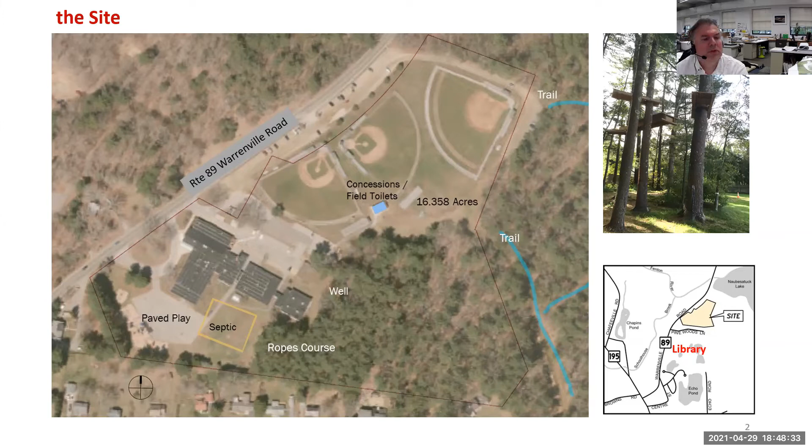As we think of the building fitting into the site, we look for opportunities for outdoor spaces that can be transitions from the built world to the natural world. And I think this site gave us a lot of opportunities for that.

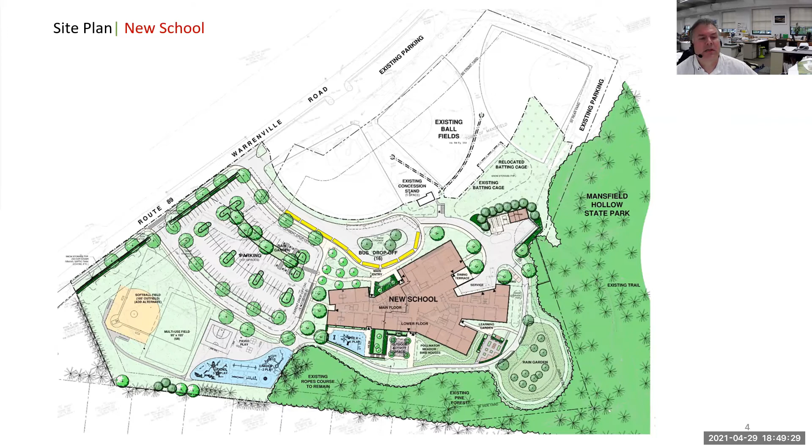If we zoom in a little closer at some of the potential of these outdoor learning spaces, these are gardens that are transitions from the learning that happens inside to the learning with the natural world outside. And from day one, this was a pretty important thought regarding the forest and the connections to the forest.

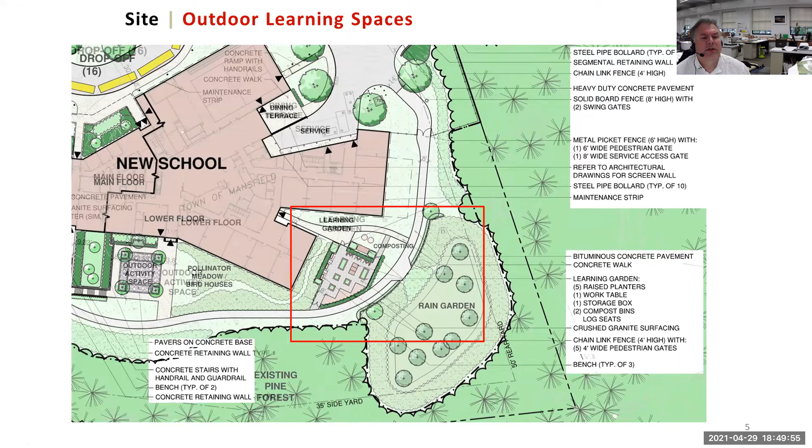Some examples: we'll have some raised planters, a work table, a storage box, compost bins, some log seating, a variety of different surface textures. In this case, we'll have crushed granite surfacing. And you'll see some birdhouses, composting examples, etc.

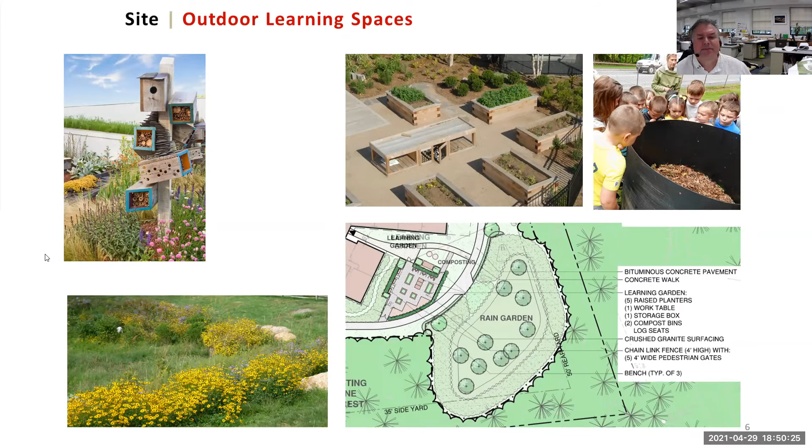We also have some different kinds of educational play, which is more common, playground equipment. But we saw an opportunity to introduce some musical components, such as a kettle drum, chimes, so that little ones can play with tone, rhythm, and explore their musical creativity with the instruments.

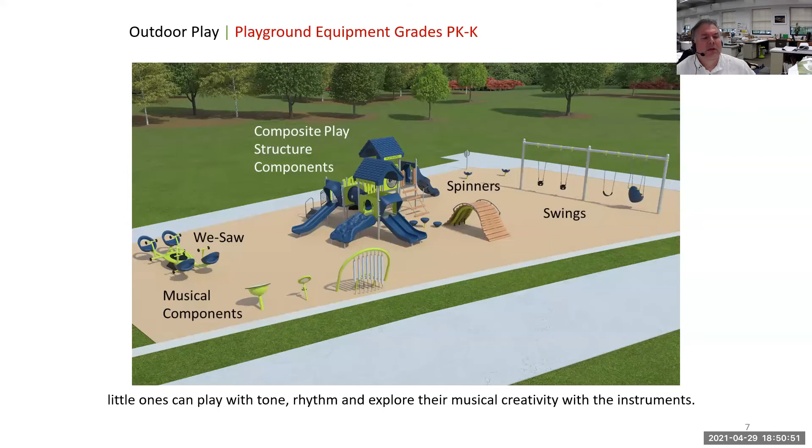We also have a very elaborate relocated Vinton playground equipment for grades 1 and 2 and 3 and 4.

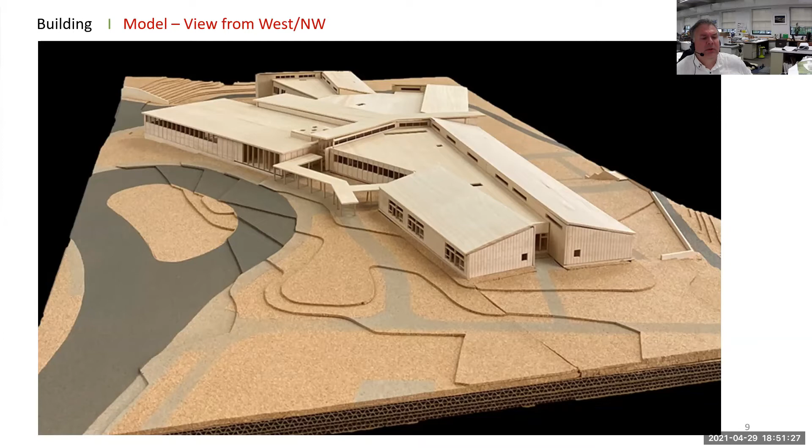So as we go inside, I'll take you through the floor plan. Note that the furniture shown is just a test fit; we're still making decisions on the furniture. But as you can see, the main entrance here underneath the canopy is adjacent to the Learning Commons and makerspace. Across the main corridor is the administrative wing.

The pre-K K house is on this side of the building, the west side. We have the first grade house or second grade house, depending on how the district wants to position the different grades, and we have a second grade house here. In between is some mechanical storage, restrooms, world language, OTPT. We have some special ed classrooms scattered throughout as well.

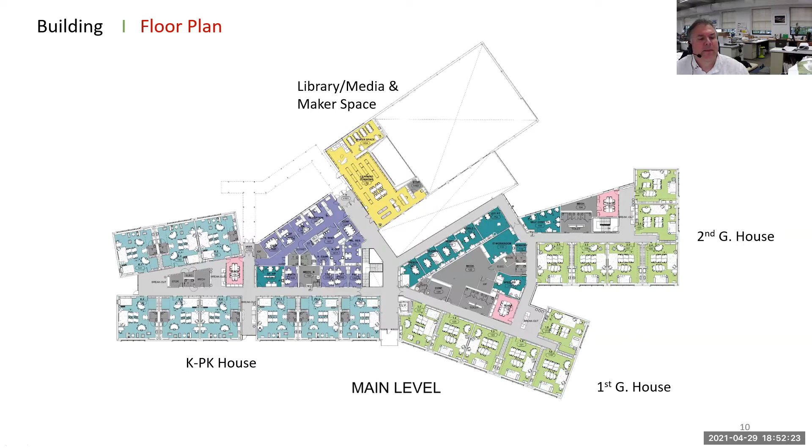As important as the discussion early on of the outdoor connections and the potential of the learning programs to happen in those transition spaces, we're also looking inside the building at the potential of different breakout conditions, so the teachers can take a class or group of students out and do a different kind of learning and teaching. Adjacent to some of those breakout spaces in each of the houses, we have a teacher's workroom where the teachers can collaborate, brainstorm, and get creative with each of the different houses and the activities of those houses.

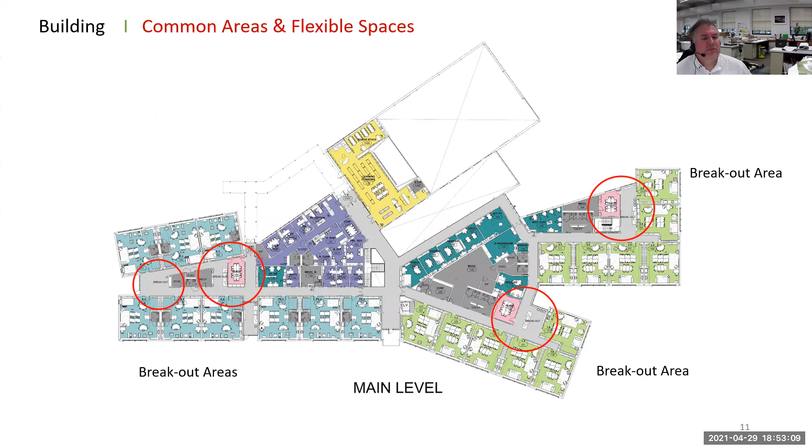Here is the lower level plan as you come down the stairs, the main staircase. We have music and art down here. We have the third grade house, the fourth grade house. We have the gymnasium, and we have a common area here, which is somewhat flexible, the cafeteria, and potentially an art program element here, but it's highly flexible, this space.

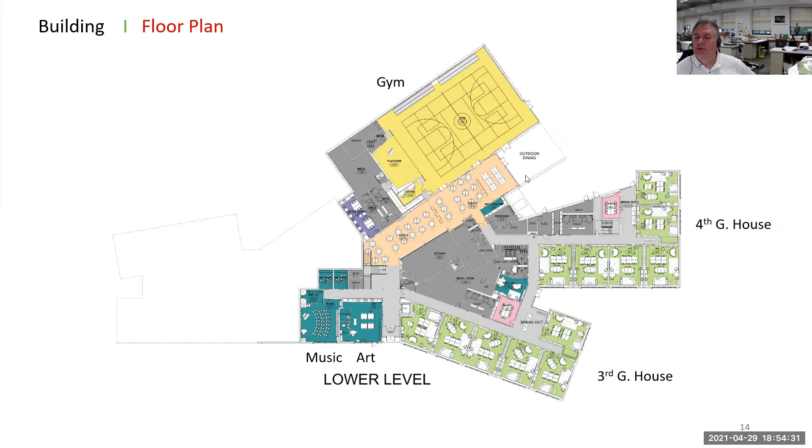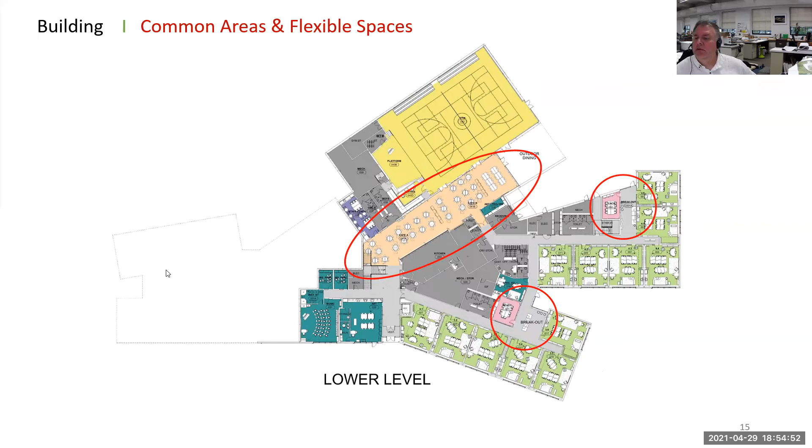So again, we have some common areas, the cafeteria and art, and similar relationships here with the breakout spaces and the teacher workrooms. Each house has one, so it could be a very active area within the school.

Now, we talk about the forest adjacent and trees and the wood in the school. We also think about how the building relates to wayfinding in the school.

So what we've done is held open the space conceptually of the common area, which is the cafeteria flexible space, and through some wayfinding color schemes, each house can represent its own color and they come together in the communal space. So what we're trying to do here is that as the trees branch out, they lead to each house in the common area. There's a diversity of trees. All houses are represented.

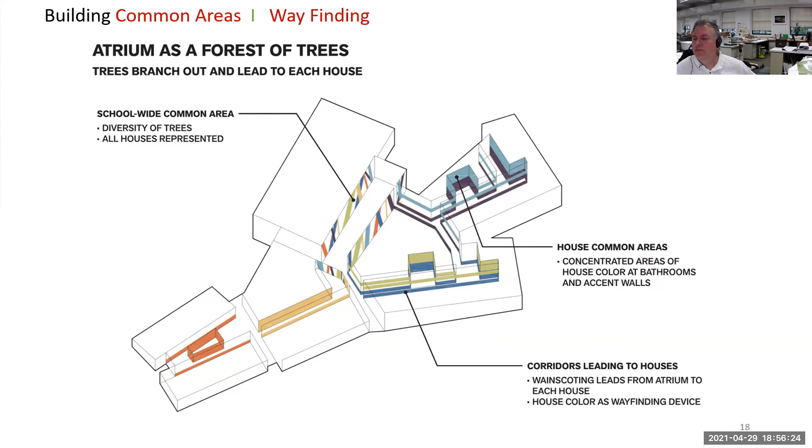The pattern is inspired by the trees. We're not saying we're going to paint the trees outside, but we're gathering some inspiration from art and color.

So here's a study of how that would look inside the cafeteria space. Again, this ties all the horizontal elements together. The columns could potentially become trees, playing off the verticality of the atrium space.

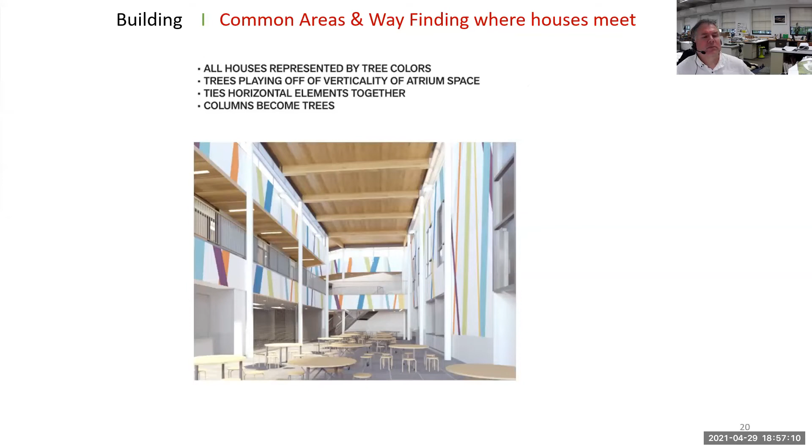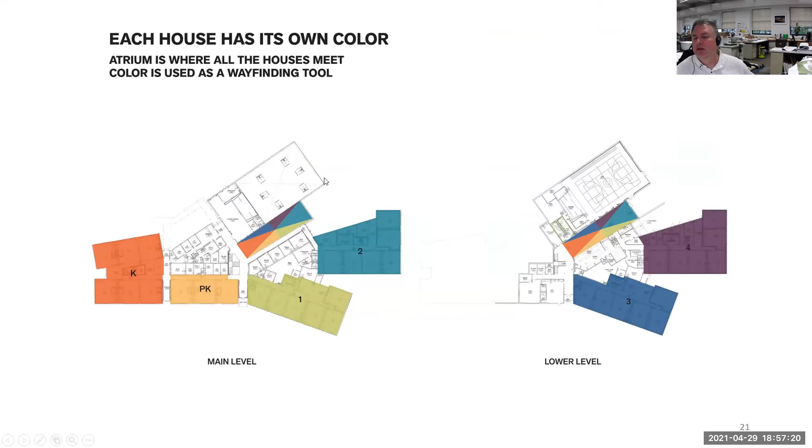Wayfinding in terms of each house having a different color, coming together, accumulating in the common space. An example of how we would disperse that color throughout.

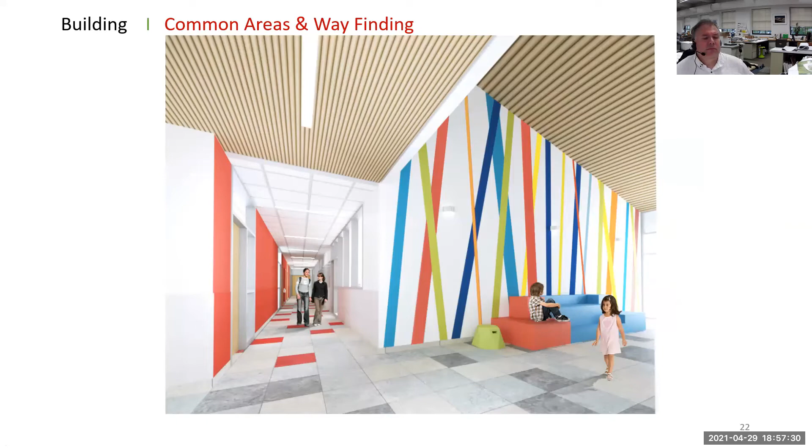I'd also like to say the design for the new school includes safeguards against future pandemics, including new ventilation systems, a higher level of air filtration, ultraviolet light to disinfect the air as it passes through, and the ability to automatically flush air out of the building on a regular basis. We have cleanable surfaces and touchless plumbing fixtures.

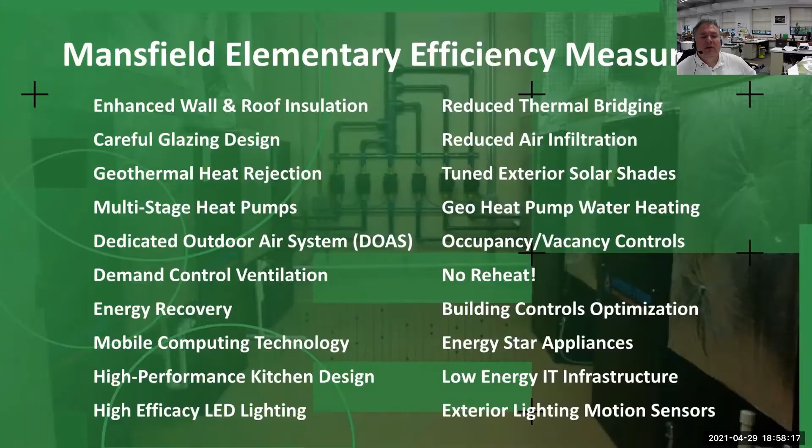A net zero energy school produces as much energy as it uses on the site. So we've achieved that.

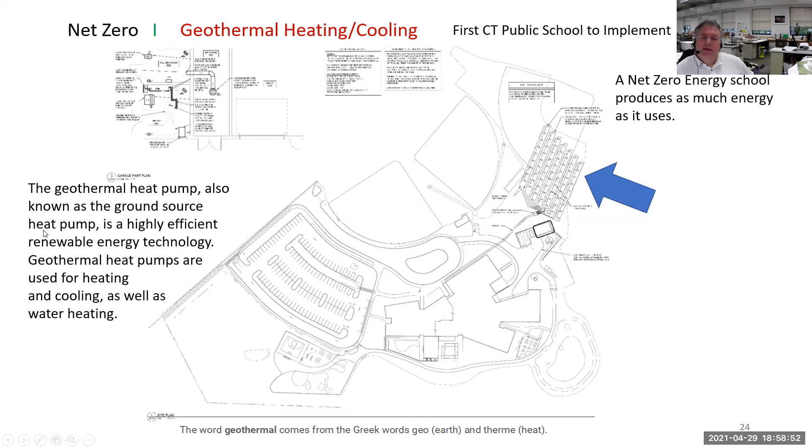That's one element. The other element is photovoltaics. So we saw how much we could fit on the roof, and we have almost 500 kW on the roof. And I believe this EUI has gone down since then, which the lower the number, the better.

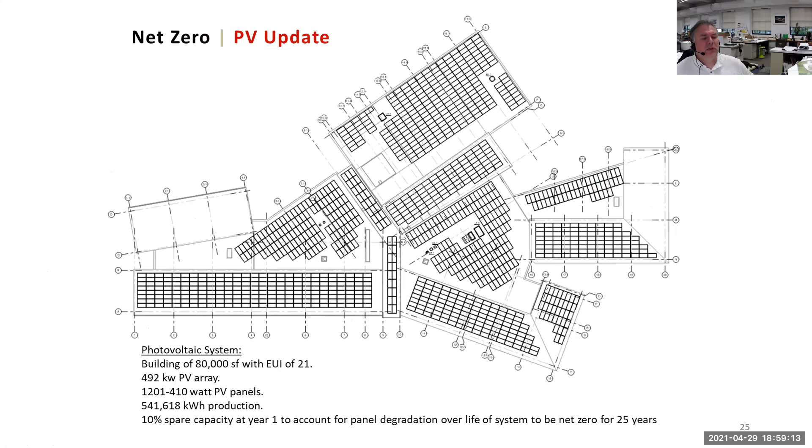We've also done a series of daylight analysis with our consultants. They have modeling software that does this. They checked at various stages in the process of designing this building. We wanted to be very conscious of where the building is oriented, while at the same time having views out of the classrooms, views towards the forest, views towards the educational programming outside.

So you can imagine the complexity of trying to balance not having a very efficient box, but allowing the excitement of the houses to have their own distinct identities within the umbrella of the school, breaking down the scale for the children.

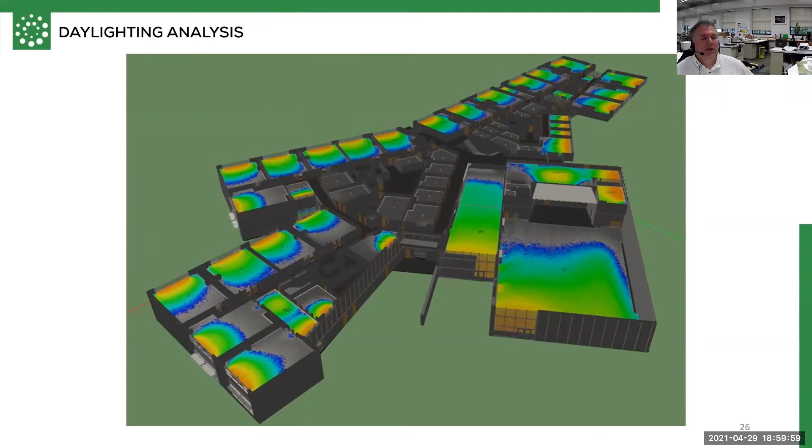So those studies actually helped us in the design. In this case, we were to put the horizontal sunshades on the south to make sure that we get light drawn deep into the space without a lot of glare.

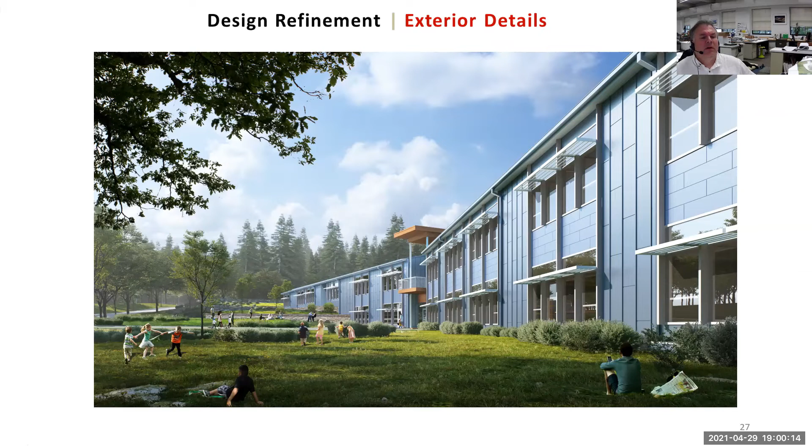Our mechanical, electrical, and plumbing consultants, as well as our net zero consultants, used energy modeling software for our school to see how it performs at various stages in the design. So it was a give and take in the whole process to make sure we were meeting all the criteria for the net zero school.

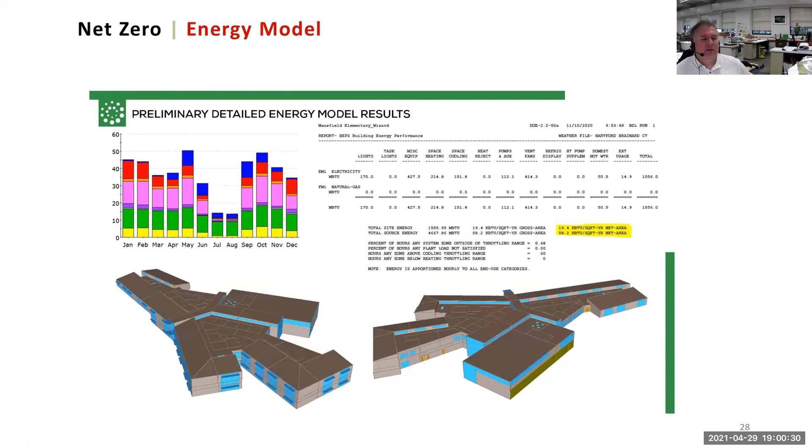We also work in large-scale models, testing out sectional relationships on the topography, orientation, and physically get an understanding of detailing.

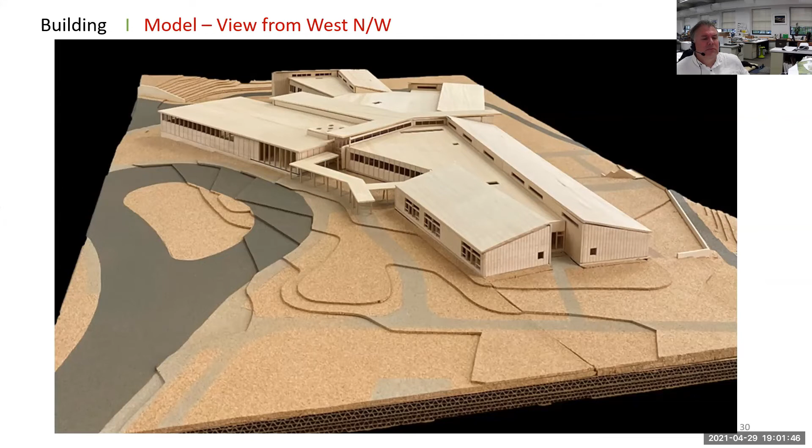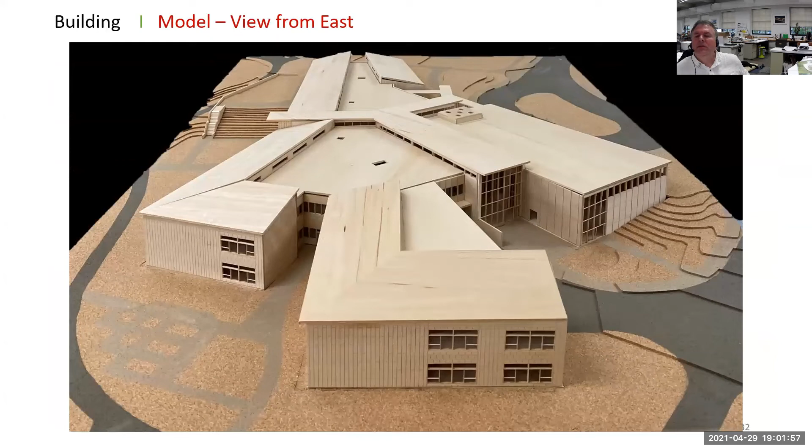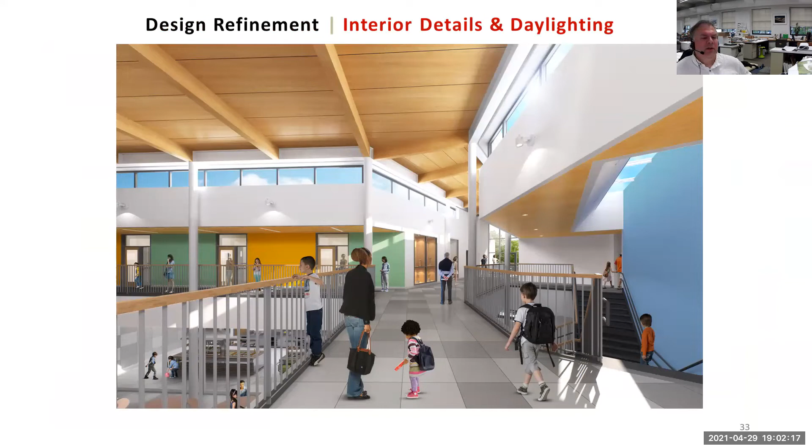Again, back to the rendering of the main corridor. We always try to do layered spaces where there are varieties of accents in terms of natural lighting, compressed spaces, release spaces. So it should be a very, very interesting spatial progression through the school.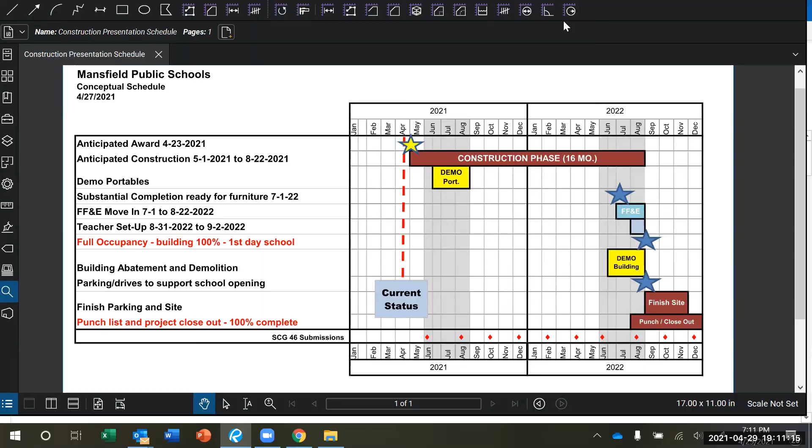We're on such a tight timeline trying to get the school ready and open for the fall of 2022. There will be a few things that happen into the fall, a little bit of the spit and polish, a little more paving and things like that. But we'll make sure that the school itself is complete, the building is ready and safe. And again, we'll work very closely with the contractor to maintain those safety protocols with fencing and all.

Hopefully my portion of the evening has put your minds a little bit at ease. We've got a great team watching out for the project. We've done some wonderful work to date. We're very excited about the project, about it being net zero. We are under budget, as Randy had stated, and we are on time, and we're going to stay that way.

So with that, I'll turn it over to Ryan Ailsworth, the town manager, for a few closing thoughts. Thank you.

Looks like, Scott, you might have to release your video for your presenter. I did stop the share, Ryan, so. Yeah, same thing happened to me. Yeah, I see the share screen now, but I did release it. Oh, not sure it's going to let me share my screen, but that's okay. I'll proceed in the interest of time.

So my name is Ryan Ailsworth, I'm the town manager of Mansfield. I've been on the job for about 5 months, and this has been a really exciting time to come to the community and basically roll my sleeves up and become a part of this very exciting project that's going on.